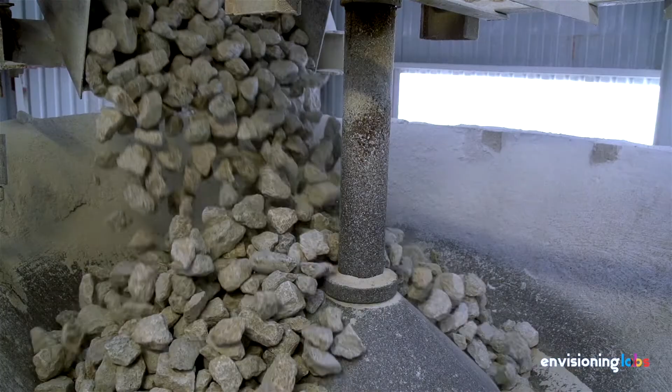Remember, if it can't be grown, then it has to be mined. Minerals and metals are building blocks of all new technologies and all actually existing technologies. Reports estimate that mining comminution takes about 3 to 4% of the global energy budget, so it's a massive energy draw. It's also, at the same time, very inefficient.

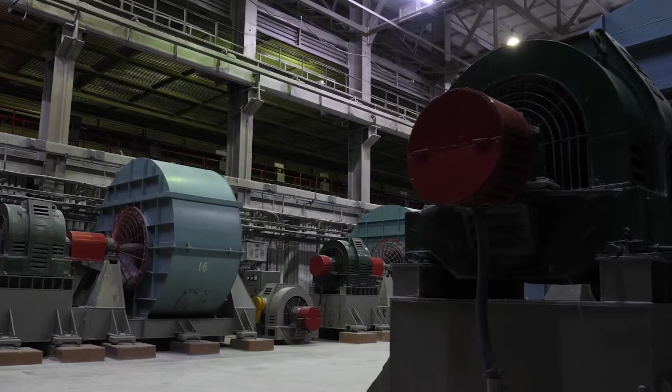Developing new comminution processes is so expensive and the timeline for adoption so long that very few people are bold enough to start the journey.

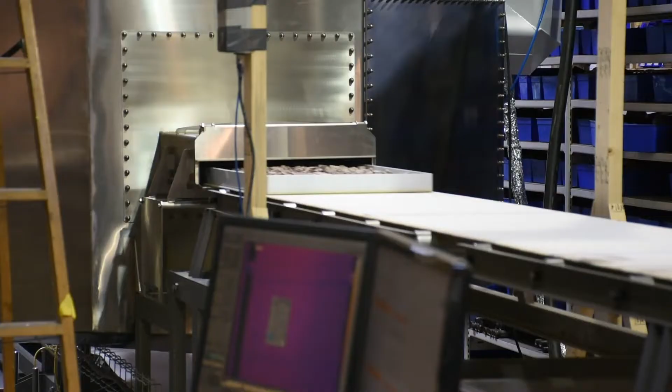KenMicro is transformative because we use microwaves to transmit energy directly to the desired location of breakage in rocks and to sort ores to remove barren material prior to grinding. Lucky for us in mineral processing, valuable minerals typically heat well upon microwave exposure, whereas low-value minerals do not. So microwave treatment of ores results in the differential thermal expansion of mineral grains, yielding fracture along grain boundaries, and also gives rocks containing valuable minerals a thermal signature.

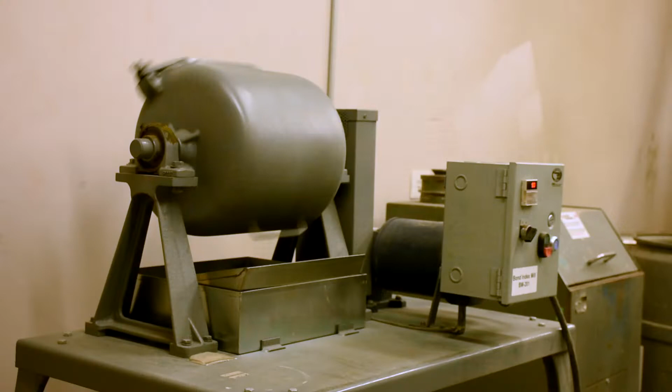In KenMicro, we use these effects to reduce ore competency, selectively liberate valuable minerals, and to sort ore particles so that waste rock can be rejected before grinding.

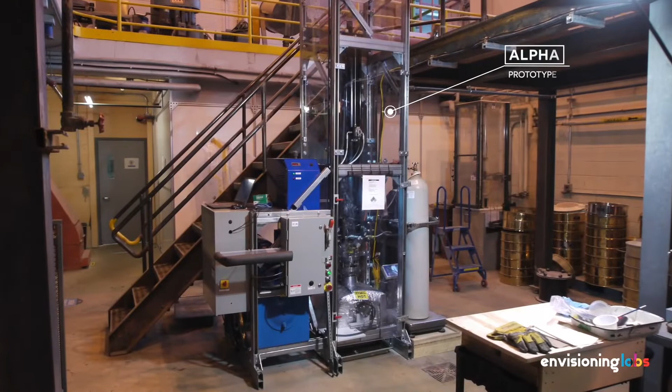TCO2 is innovative in the sense that it uses a completely different principle for breaking rock than traditional mechanical comminution. We formulated this idea where we would put the rock in a chamber, we would inject CO2, we would compress the volume inside the chamber.

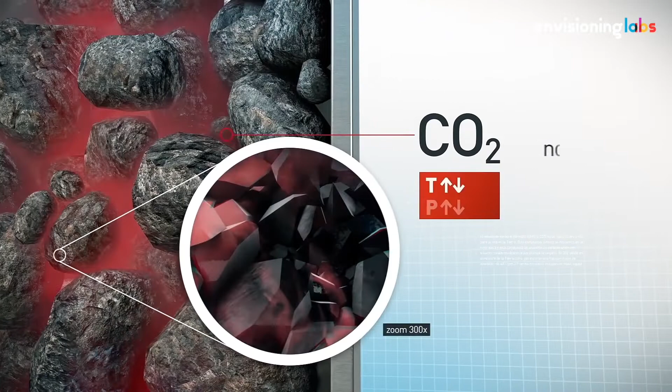The CO2 would permeate through the rock rapidly because it's now in a supercritical state, and then we rapidly decompress the chamber below the critical threshold. That process of rapidly decompressing the chamber causes the CO2 to rapidly expand, and that rapid expansion then permeates throughout the rock and you shatter the rock from within.

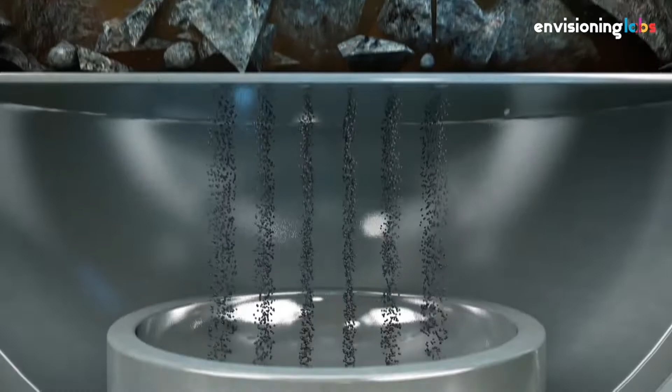Everybody has at heart to design more eco-efficient flow sheets. But it is a very complex problem, composed of multiple input variables, extensive equipment options, and multiple flowsheet configurations. This is what IntelliCrush will deliver.

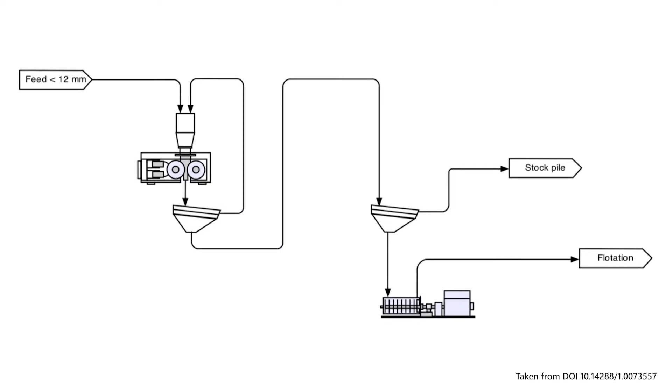Artificial intelligence is about decision-making. Corem, Ivado, and BBA will provide years of comminution test data, flowsheet designs, and AI algorithms know-how, a winning foundation for IntelliCrush. We will use it to evolve optimal circuits, and we will use it to establish the best sequence of tests and decisions to design eco-efficient flow sheets.

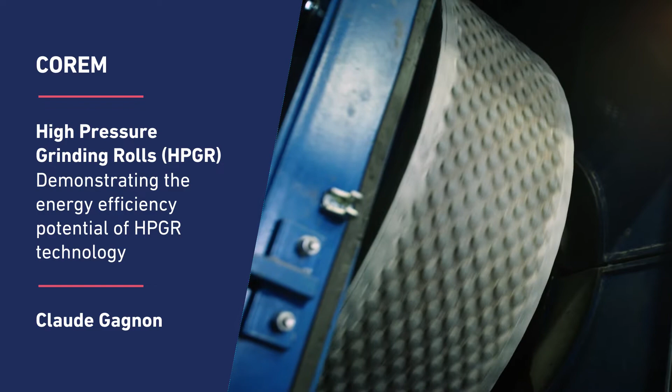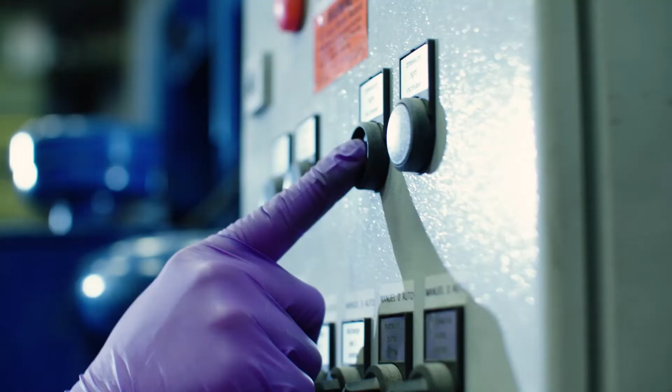High-pressure grinding rolls, or HPGR, use compression, the most energy-efficient approach to grinding currently known. Recently, this technology has been increasingly adopted by the mining industry. However, it is mostly limited to primary grinding in replacement of SAG mills.

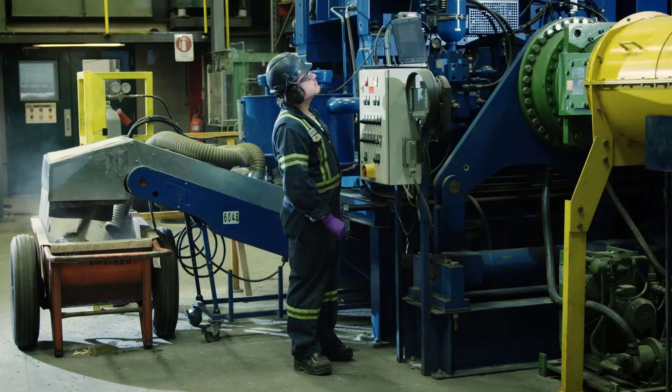The ore is still brought to its final size by very energy-inefficient ball mills, which consume approximately half the grinding energy in a circuit. We want to demonstrate that HPGR can also replace ball mills.

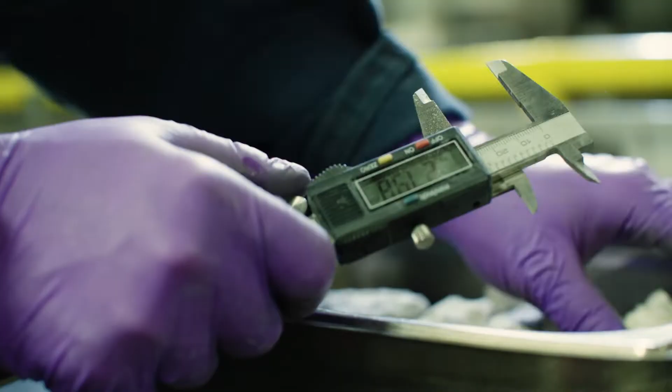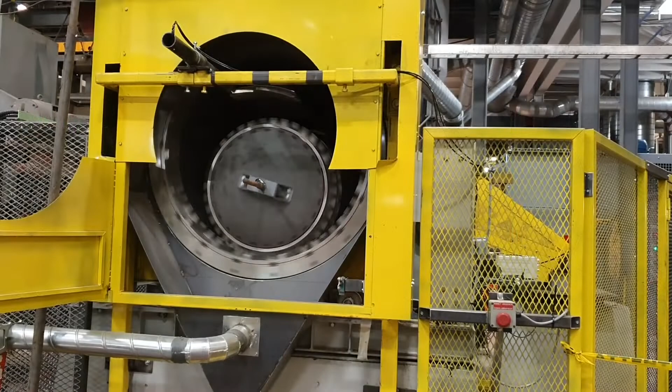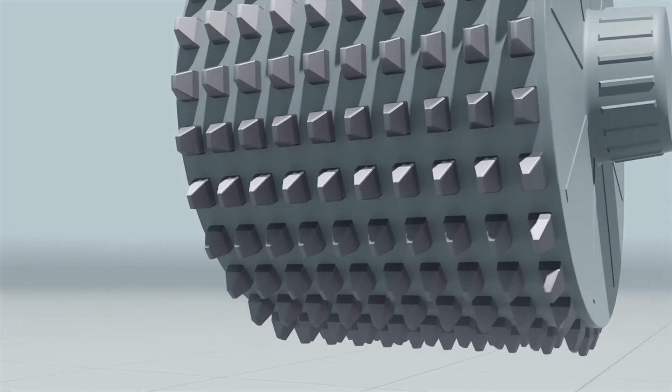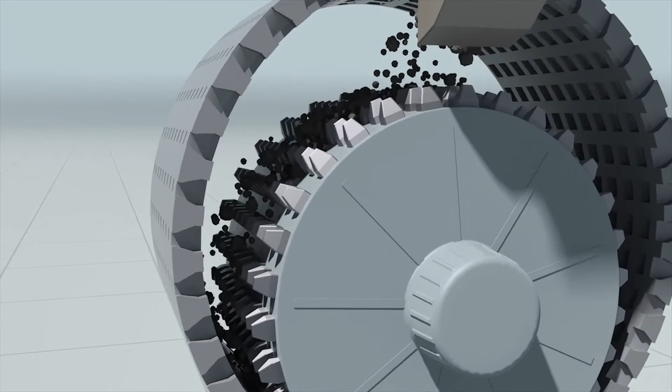The outer anvil ring has pockets at its inner surface. The inner hammer ring has protrusions that mesh with the anvil pockets as the rings rotate in unison. Ore feeds from both ends, above the hammer, and flows into the gap between the rings. Large rocks are broken by point loading.

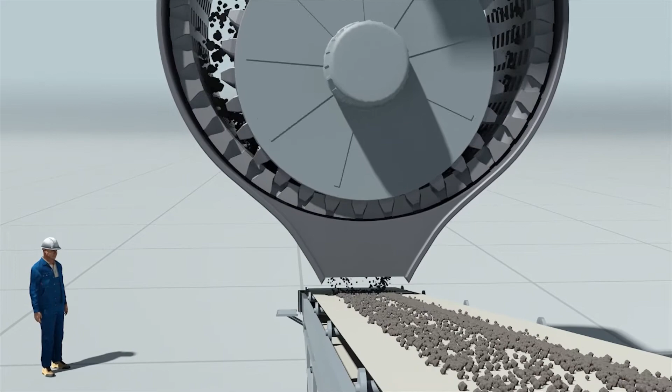Small rocks and fragments flow into the pockets and are crushed by the hammers. Hammers then push fractured rocks through the bottom slot in each pocket and into a collection chute. Gravity and hydraulic pistons apply the hammer rock breaking force.

Our innovation, SHOT, selectively weakens ore right at the boundary between the valuable grain mineral and the waste or host rock gangue. When minerals heat, they expand, and this expansion causes fracture at the grain boundary that can lead to reduced ore competency and enhanced liberation.

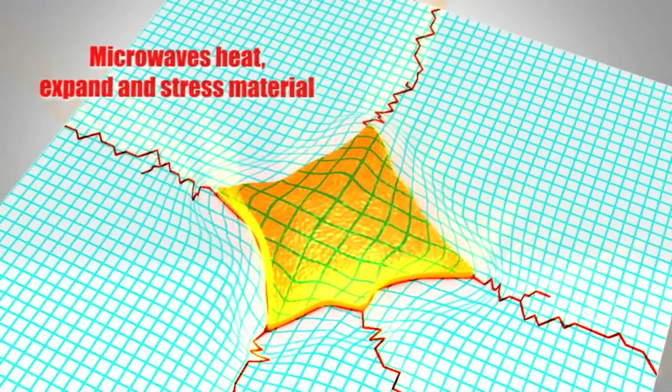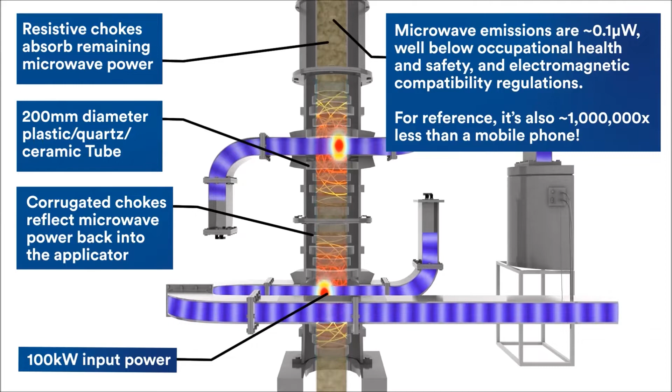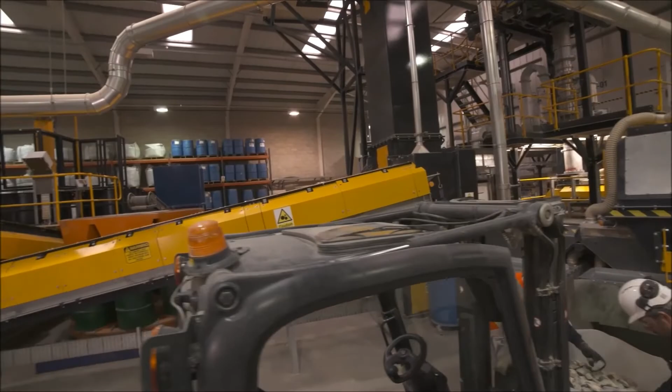These mechanisms offer the opportunity to reduce comminution energy requirements, increase throughput, increase grind size, and increase valuable metal recovery. The Crush It Challenge was a great opportunity to apply shot technology to specific Canadian ores. It was great to be able to demonstrate the applicability of shot technology to Canadian miners.

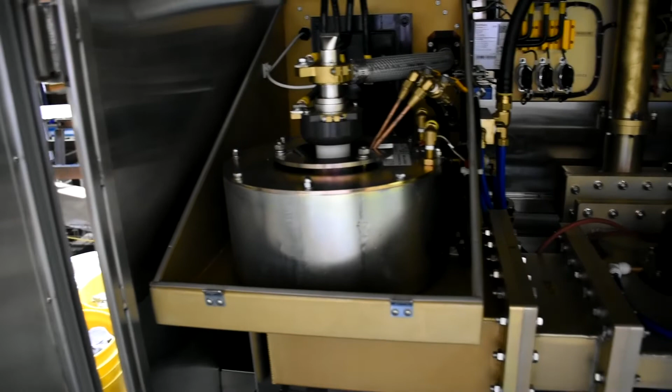One of the challenges with microwave technology is that you can't demonstrate energy savings at the bench scale. You need to go big, you need to have high tonnage, you need to have high power. It's a big jump from something that looks like a kitchen microwave to 100 kilowatts.

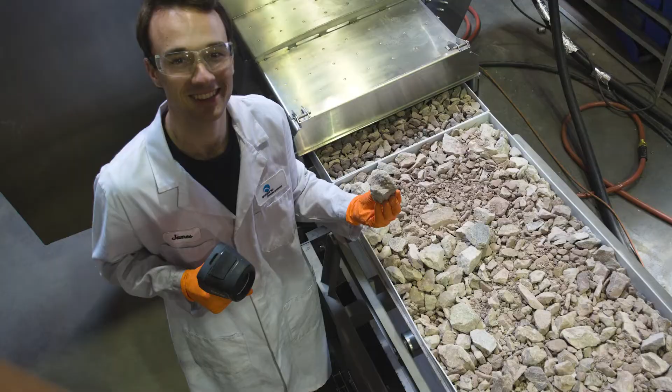So the influx of cash from NRCan allowed us to advance the technology more quickly than we otherwise would have been able to. We started off with this project as a team of 3 from Envision Labs, but over the project we were able to grow that team from 3 to almost more than 10 people.

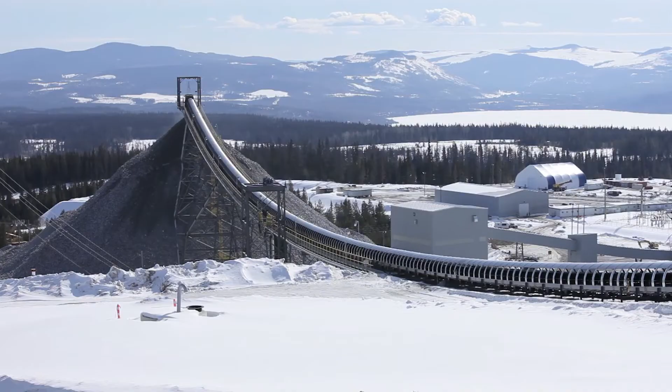It's really the Crush It Challenge that really provided that spark that allowed us to turn the idea into a project. Great opportunity to advance our technologies, but also as innovator, we are very excited by what we've seen from the other projects. I strongly recommend this model as applied to other areas in the mining industry innovation ecosystem needing rapid and transformative change.